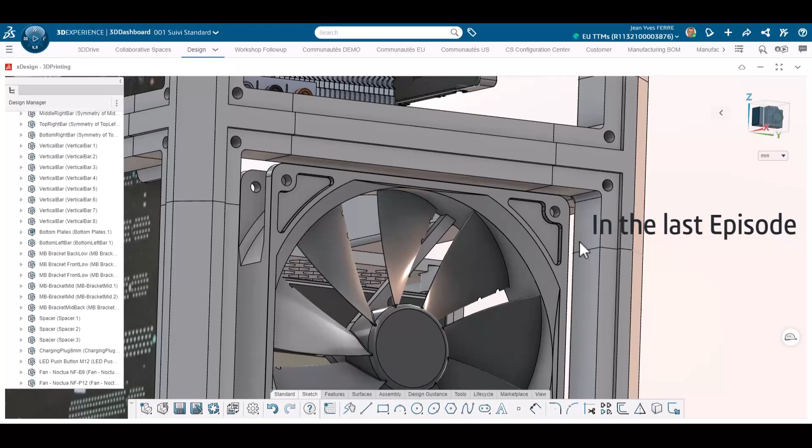In the last episode, we created backplates to hold fans, buttons, and plugs. In this episode, we add a personal touch to this computer case. If you haven't recognized, this is a Star Wars theme.

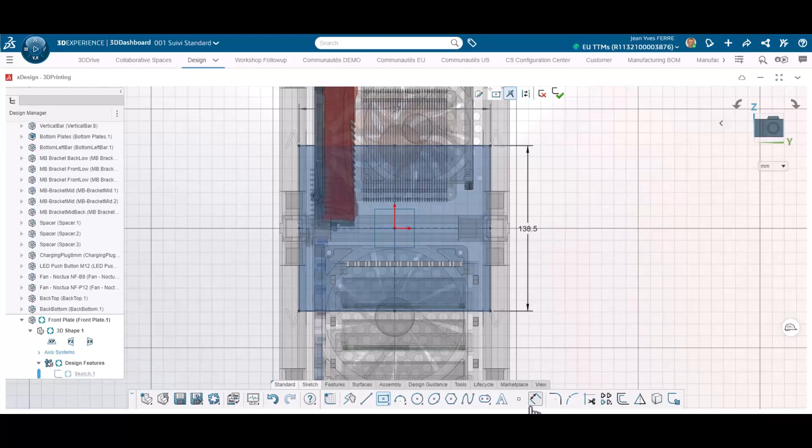I start with front panels. I'd like them to have vents, but shaped like these ones here. So I create a simple extrusion with holes, fillets and chamfers, as we have done in all episodes so far. First I create the extrusion and I mate it to the case. I keep an offset of 1 mm on each side, so there is no interference.

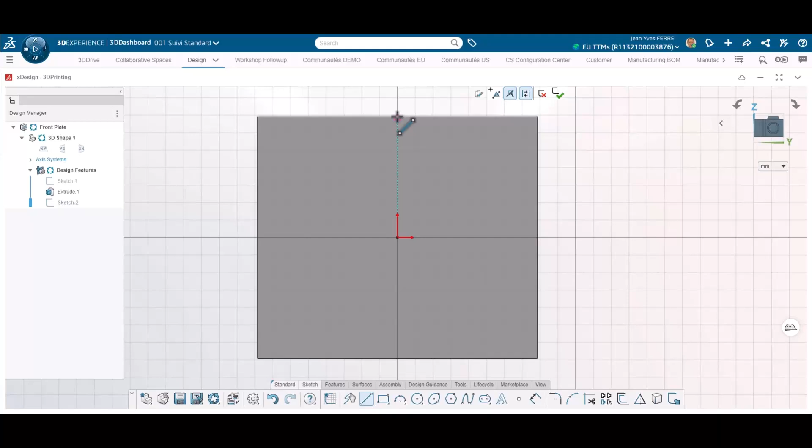I do the same for the second panel, actually the same part but duplicated. Again, 1 mm offset on each side. Now I can take care of the pattern itself. It is made from sketch slots of two sizes that complement each other. I start with the small one in the middle to leverage symmetry, then I sketch the larger one.

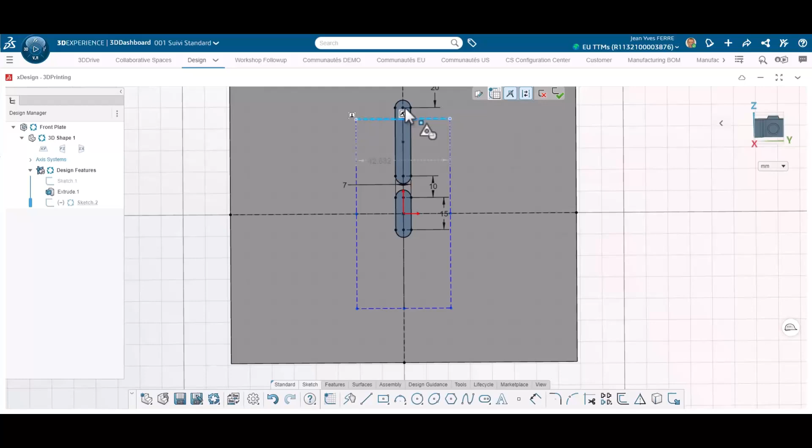It needs to be organized in a geometric layout, so I add some dimensions with the edge, and the spacing between slots will be the same everywhere. As always, I prefer relations to dimensions in case there is any change, like aligning those two edges. Then I create a rectangle that will control slot position.

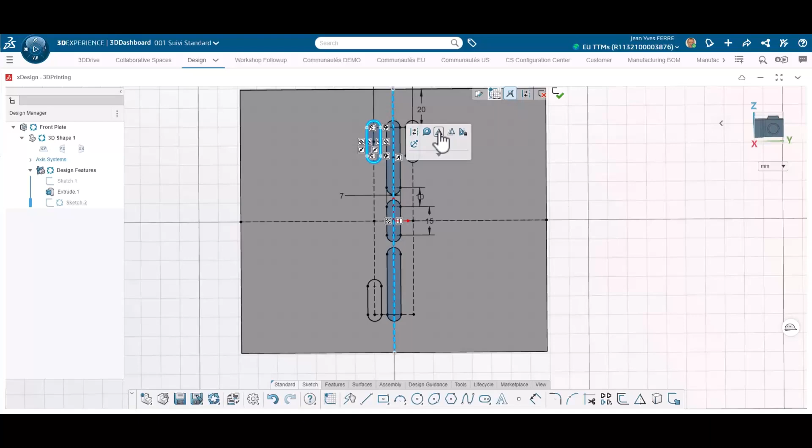After the first vertical mirror, I continue with a slot in the corner, and I add equal relations again to avoid dimensions. A couple of mirrors later, most of the slots are done and I need to finish with the large one on the left. A relation again and a dimension for the spacing. After this last mirror, the first shape is ready.

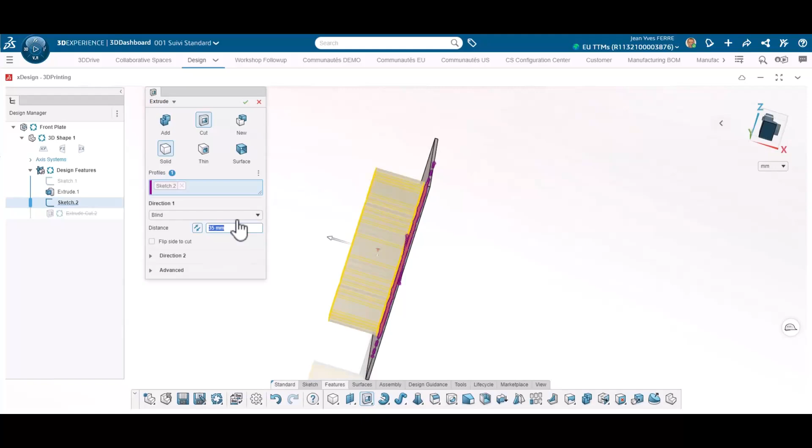Now I want to make a pattern of this shape on each side, so I use this specific option of the pattern feature with the same dimension. I could have done only one side and finished with a mirror feature on the other side. The result would have been the same, but I could have saved one dimension.

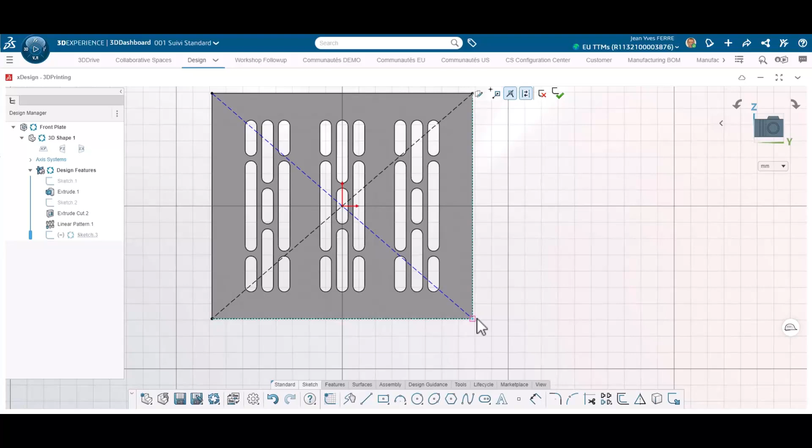Too bad. Now I create holes as usual, but for that I create these diagonal lines, so I add only one dimension to position a hole. Of course, diameter is also needed. Again, to avoid doing the same on other holes, I create lines in the middle of each edge to create a sketch mirror for the other 3 holes.

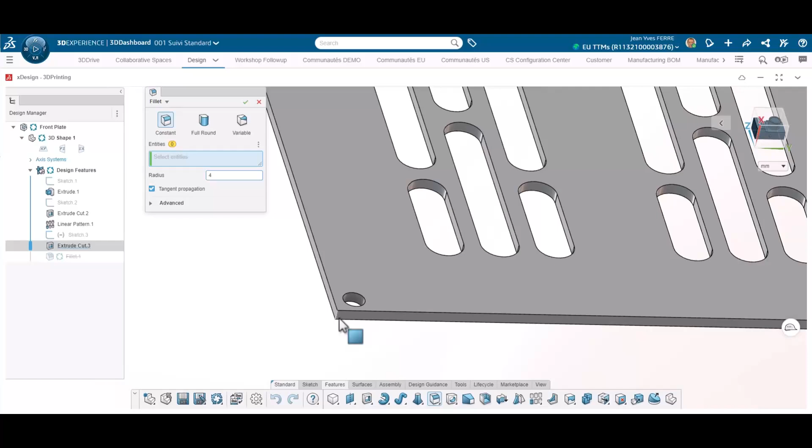Then the fillets, where I leverage xDesign assistance to propagate on other edges, and the same for chamfers. Front panel is finished, I can update the assembly to see the result. For side panels, I would like to mimic the Death Star surface, in particular this venting hole for reference to Star Wars Episode 4. So let's go!

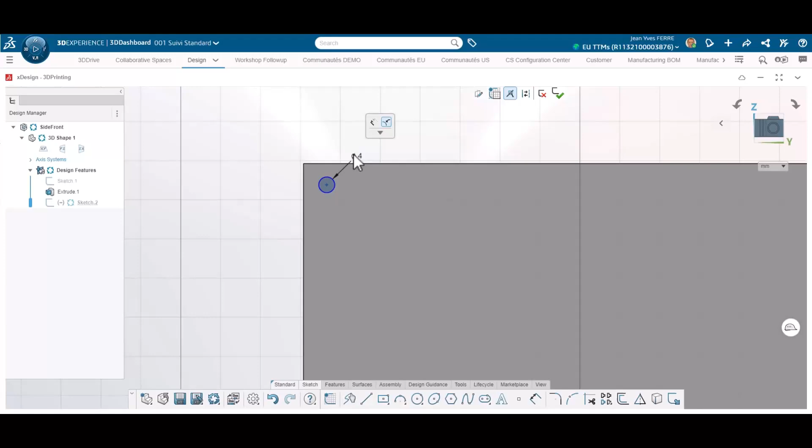As always, I start with a simple 2 mm extrusion where I add holes. No special efforts on these panels, so I add only 2 holes on the side. Then I mate the panel in place, again with a planar mate and 1 mm distance mates on the sides.

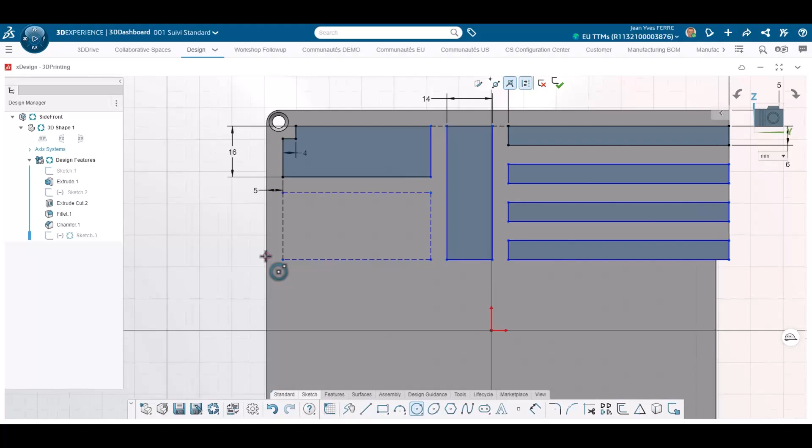I would like to create a trompe-l'oeil where it's difficult to say where panels are separated, so it won't be a straight line. I create a jog on the panel and I start creating rectangular shapes to represent assembly lines and buildings. Most of the shapes on the Death Star are represented with extrusions and cuts, so I will create shapes with similar depths to ease the process.

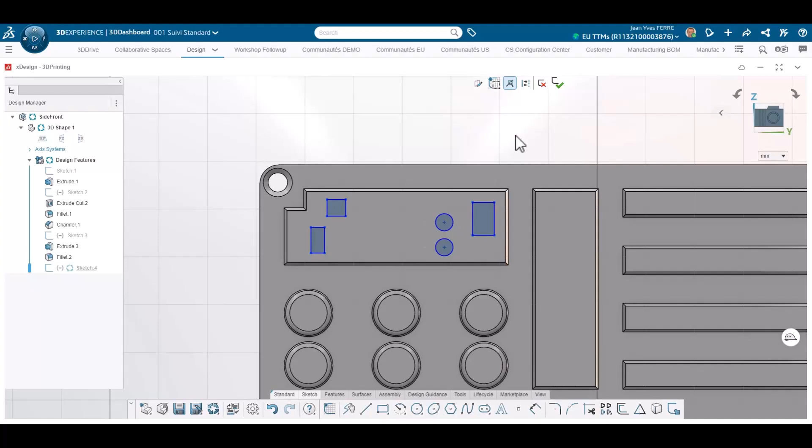Here I use a very powerful feature in xDesign. I turn solid lines into reference lines just with the cut tool and construction line switch. This way I don't lose references while removing sketch lines I don't need. Of course, I add draft angle to extrusions to add some perspective and some fillets before starting first cuts. Again, simple shapes that I cut with a draft angle.

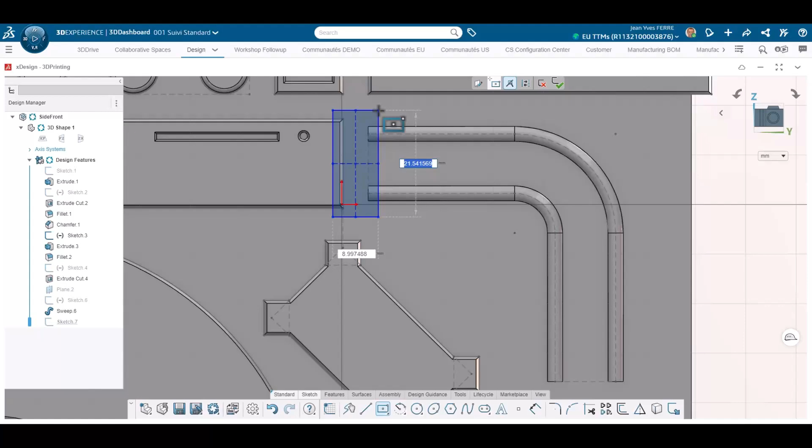Then I would like to add main pipes to this plant. So I create a sweep and some high bosses at extremities for tanks. I even increase pipe size to show how important they all are.

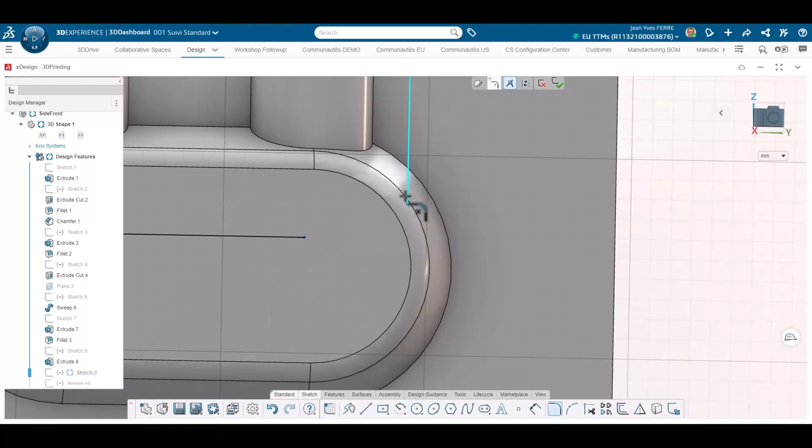The second level of extrusions is created with less depth, but on the same level, including shapes on assembly lines. I also make a smaller pipe run through several shapes with a single sweep. I just need to add fillets on the sketch, so there is only one feature.

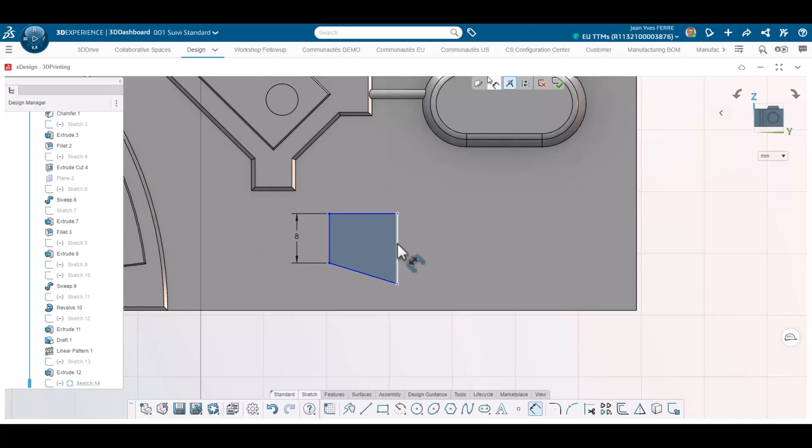After creating a hemisphere for temporary gas storage, I add some shapes on the assembly lines. I turn some simple extrusions into feeding systems with a draft angle, and I repeat the shapes on the other lines. We can imagine they have assembly lines to create droids and machines directly on site.

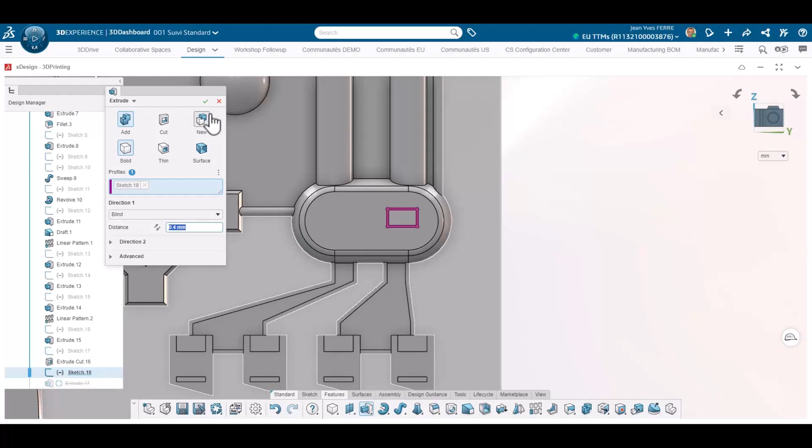Then I take care of some loading bays for TIE fighters, just after the fuel tank fed with main pipes. See how I create simple shapes to add pipes with thin extrusions. I also arrange some shapes on the main circular plant built around the mounting hole, and I link those shapes with a pipe created again with a sweep.

First panel is finished, let's move to the other one. I need to create complementary panels so they fit together, so I create a cut to fit with the jog. I add holes, fillets and chamfers, and I mate the part in place.

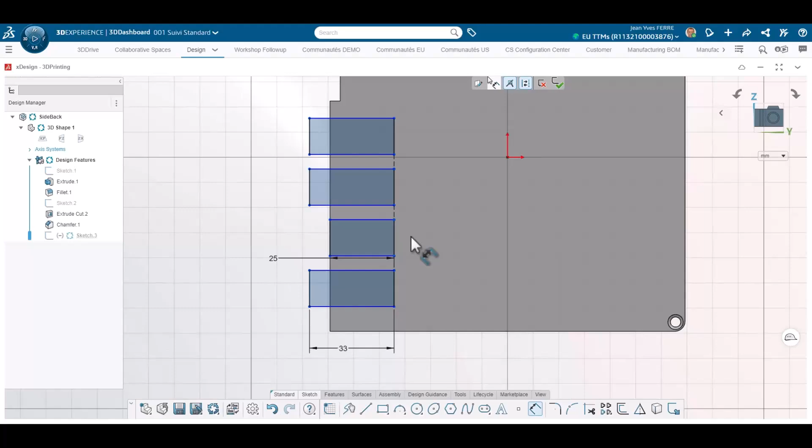Now let's continue our surface design with some large storage buildings linked with some corridors, and some venting systems on the top with those simple extrusions. Next is the main feature of this panel, the direct venting hole that leads to the Death Star's inner core, and that will be used by Luke Skywalker to destroy it.

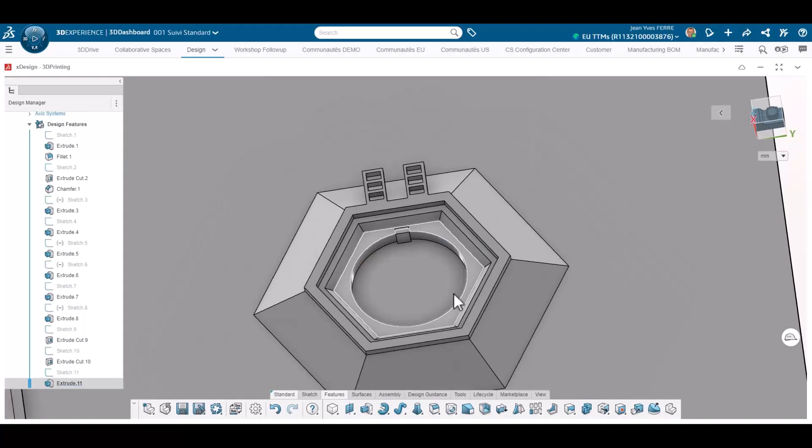I hope he's not around, so I create a hexagonal shape with a big draft angle, some extrusions and cuts. I also add this pattern around the hole to use the venting system to cool down more surface. Then I add some structure to this hole to hide it more on the surface. I will create several shapes that will take advantage of the cooling system, like those big tunnels and maintenance corridors I create with some patterns.

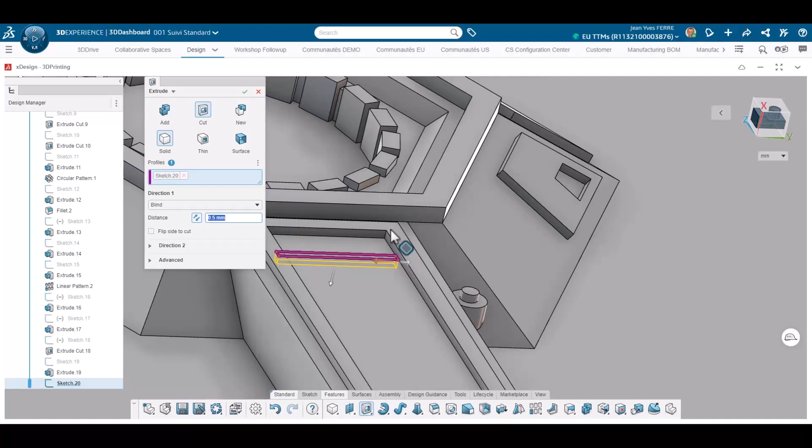There will be some control rooms and surveillance systems around this hole, and they are created with some small shapes on the sides. Now the biggest feature of the panel is ready. I need to fill gaps with some more plants so the Empire can feed their garrisons based in this part of the spaceship. We will leverage heat drained by the venting hole, given this works without air, but they have advanced technology, they must have this detail figured out.

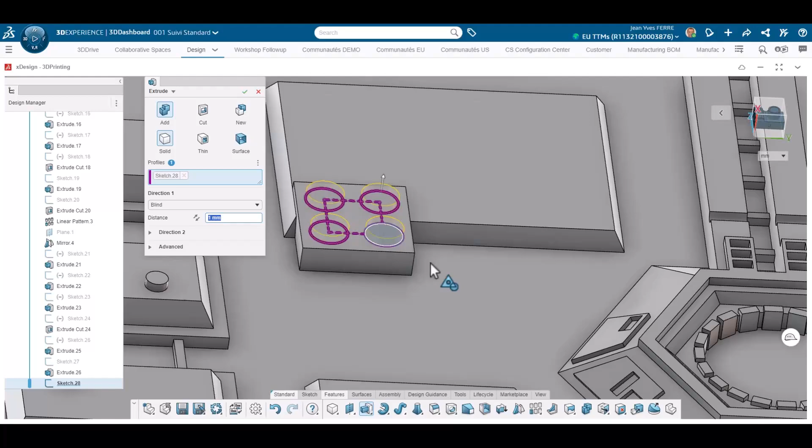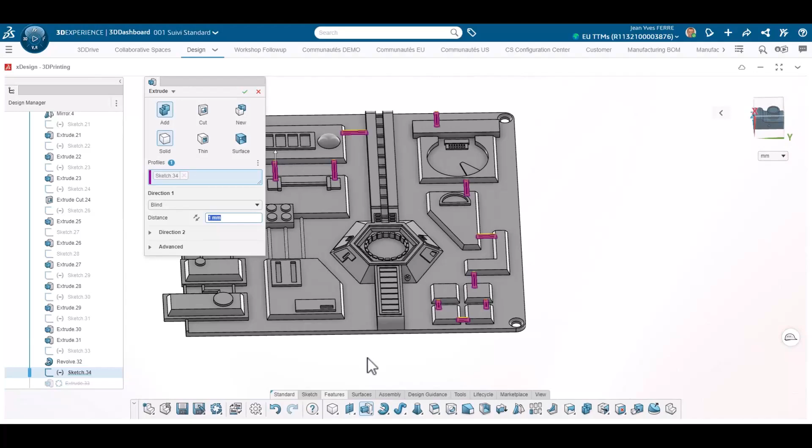So there will be some food plants on the left and some water treatment plants on the right. As we are in space, everything is covered and works automatically with some droids. So there will be a greenhouse and some plants to transform crops into something ready to eat for soldiers. I use the same extrusion depths, so all additional extrusions and cuts will be created with a limited number of features. I also add some thin extrusions and sweeps to create corridors and pipes to connect all the buildings.

Of course, there must be a lot of recycling so the spaceship can go anywhere without any supplies from the outside. Once this is done, I update the component in the assembly and the result is actually better than I expected. As always, this is now printing time.

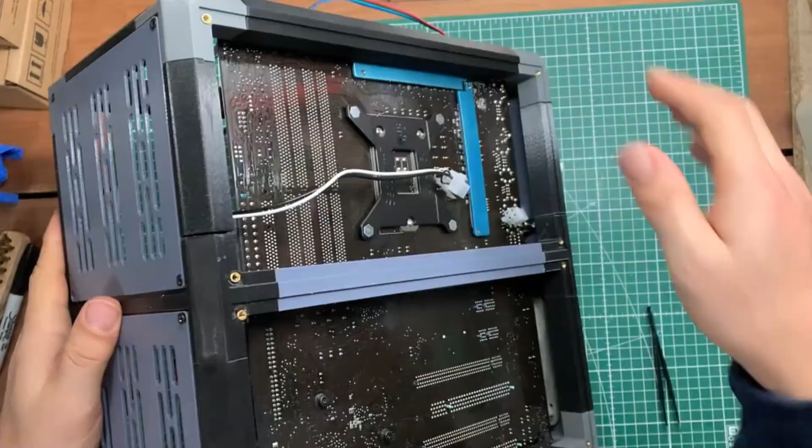After that, I will fix front panels on the case with some screws. I take this opportunity to plug the power cable behind the motherboard. I wish I could hide it, but this was not possible. Then I finish with side panels, they fit together perfectly, and I might add some paint in the future to create some texture and a bit of depth.

This will conclude our episode today. In the next episode I will finish the case with transparent panels, including the one that supports SSD drives fixed with some spacing columns.